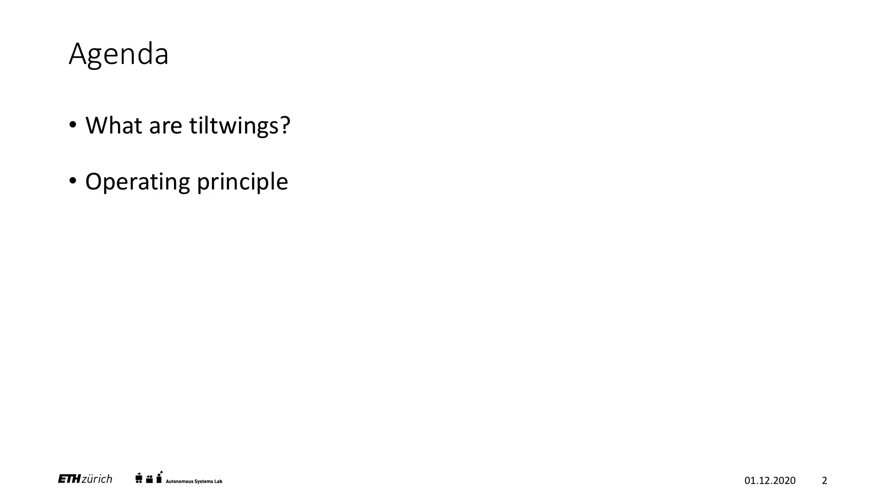In this case study, I'd like to give you some insights on how we model and control this kind of aircraft and what the related challenges are. I'd like to start with a brief introduction on tiltwings in general and why they are interesting. Then I would like to say a few words on the operational principle of such a tiltwing UAV before moving on to the core part, which is our approach in modeling this platform for the purpose of control, but then also the controllers themselves that are currently implemented on the tiltwing, which is the attitude controller on a low level and the cruise or velocity controller on a high level.

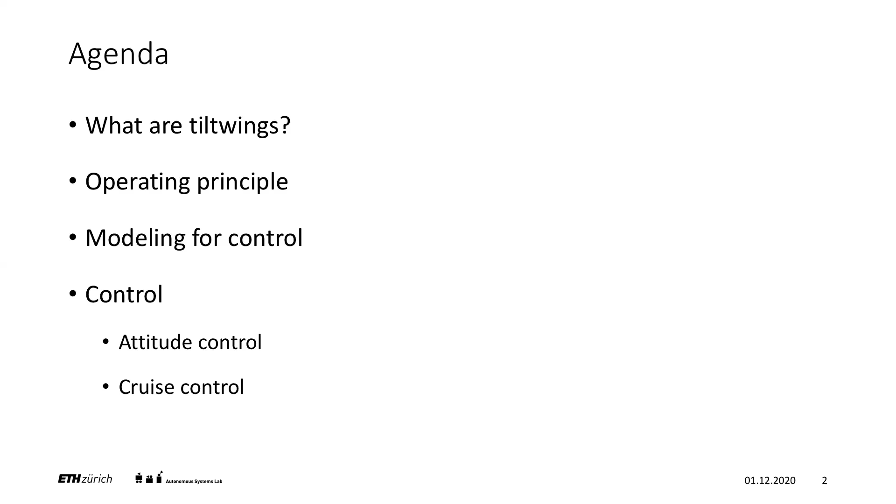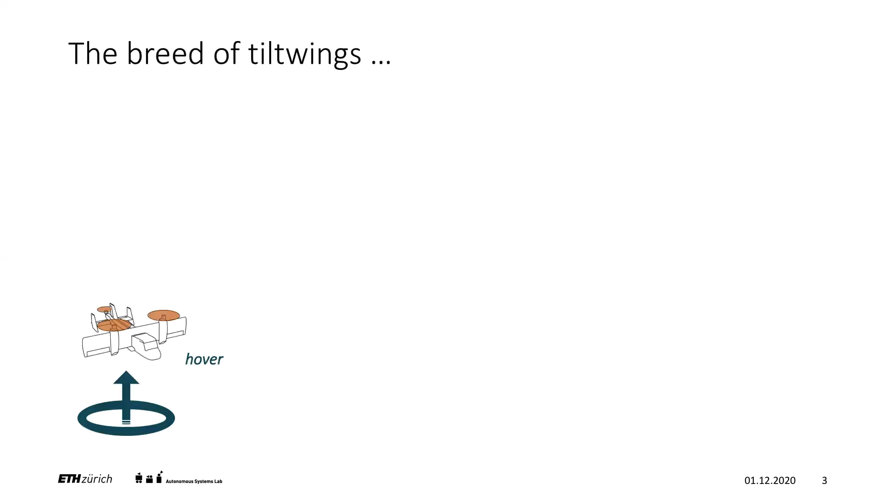So let's start with some zoology. As the name already tells, the tiltwing is a convertiplane which tilts the wing together with the propulsion between an upright position for rotary wing hover flight and a horizontal position for fixed wing cruise flight. In between, we speak of the transition phase, and there the lift is shared between the propeller and the wing. The operation in the transition phase is somewhat a blend between helicopter and fixed wing.

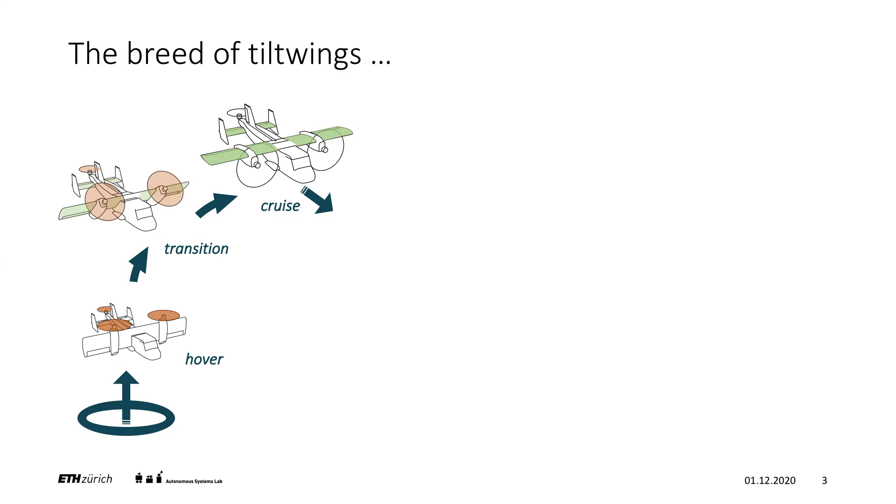Now, the advantage of such a platform, as with almost every other hybrid platform design, is the combination of the flexibility that we get in rotary wing hover flight with the endurance, speed, and range that we get from standard fixed wing cruise flight. The idea of tiltwings is not particularly new.

First examples date back 60 years ago. And although proven as a concept, tiltwings were never put into regular manned operation, and were not really further pursued. Only now, interest in tiltwings is sparked again for application with UAVs, but then also within the wealth of concepts showing up recently for urban aerial transportation, such as air taxis.

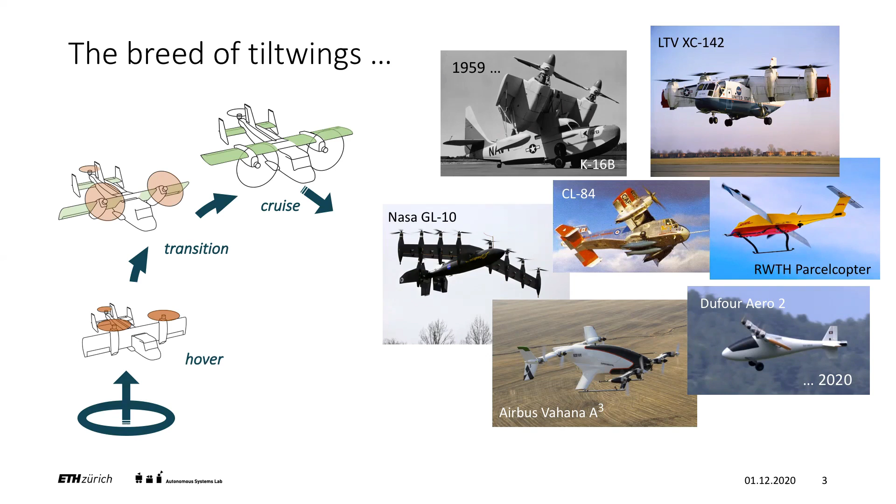Now, like with every design, there are particular pros and cons for a tiltwing. Comparing with a tailsitter, for example, one advantage is that the fuselage remains horizontal most of the time, apart from pitching. This is beneficial if we are, for example, transporting people, but also depending on the payload that one might have, this is an advantage. Furthermore, the standard aircraft tail of a tiltwing gives it additional control authority when comparing with a tailsitter, which doesn't have this additional tail.

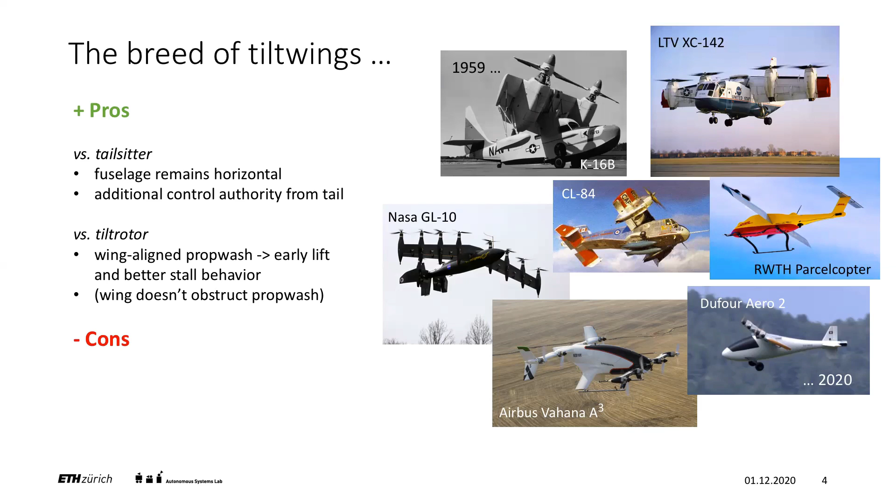Compared to a tiltrotor, a tiltwing features wing-aligned prop wash, so lift is generated earlier on in the transition, and overall, the forced flow over the wing gives it a somewhat more benign stall behavior.

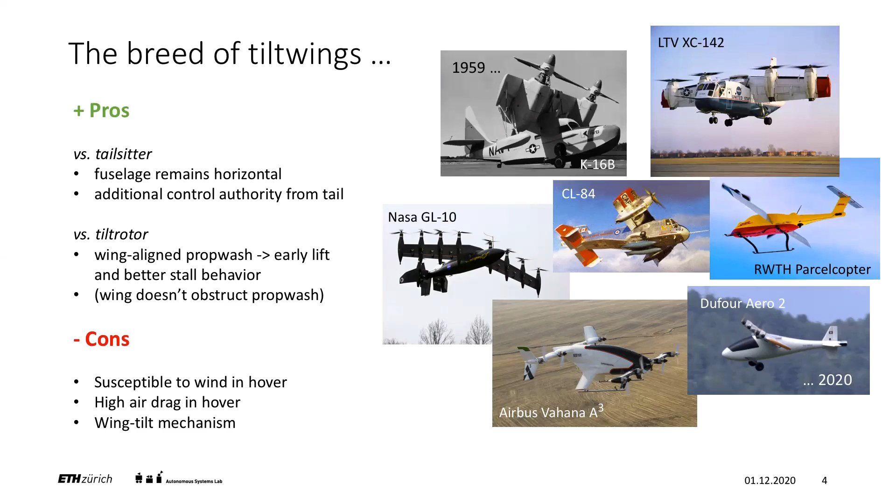There are disadvantages, however, as well. Most importantly, a tiltwing is pretty susceptible to wind in hover due to the large area exposed by the wing and potentially facing into the wind. Then also, for the same reason, it has high air drag in hover, and in the end, the wing tilt mechanism itself might be considered too complicated. But this depends a bit on the application.

So before going into more detail on the modeling approach that we choose and how we're controlling this platform, let's have a look at the basic operating principles and the controls that we have available.

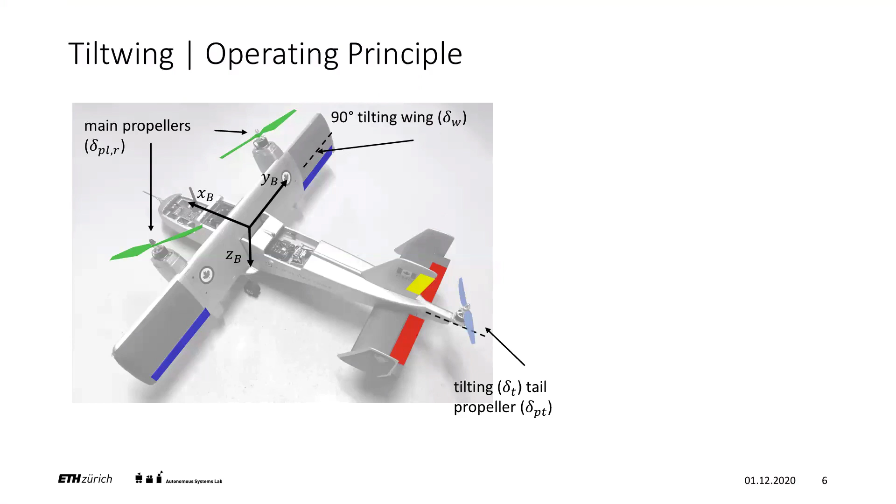So of course, there's the wing, which is able to tilt. Then we have the main propellers, which are mounted to the wing, and they generate most of the lift in hover flight. Furthermore, we feature a propeller in the tail, which is required for pitching in hover, and it's also able to tilt around the x-axis in order to actuate the yaw in hover. So overall, in hover, we fly this platform like a standard tricopter.

Furthermore, we have the ailerons, the elevator, and the rudder, which sum up to the standard fixed-wing controls that we use in cruise flight. Now, with this combination of actuators, we realized that the platform is over-actuated for the task of attitude control. So for example, in hover, if we want to yaw, we can do this in two ways.

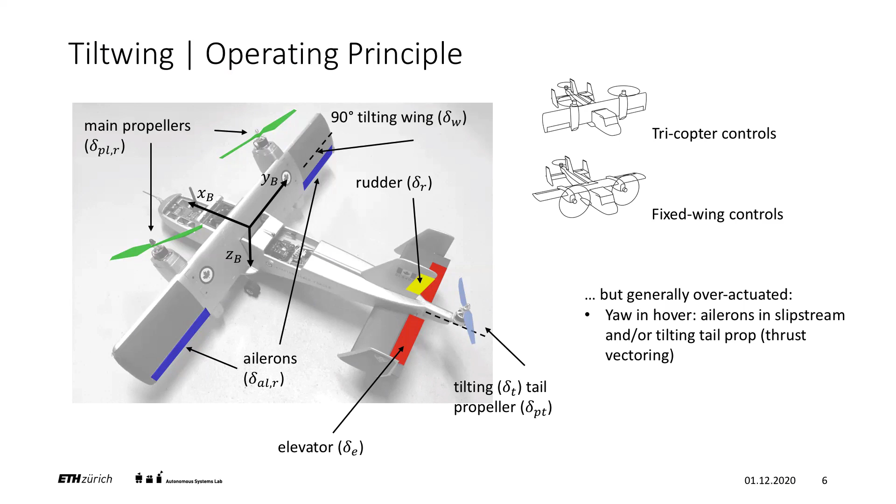We can either use the tilting tail prop, so the default standard tricopter way, or we can also deflect the ailerons, which are partly located in the slipstream, in order to deflect the slipstream and thus generate a yaw torque.

In cruise, there are also two ways to yaw. We can either use differential thrust on the propellers or use the standard way. Same for pitch, you can either use the elevator and/or the tail prop. So with these combinations, or multiple actuators for the same task, we have increased control authority in general, but we can also consider this as a set of redundant actuators, which, in case one of them fails, we would still have a backup, which is also something nice to have here.

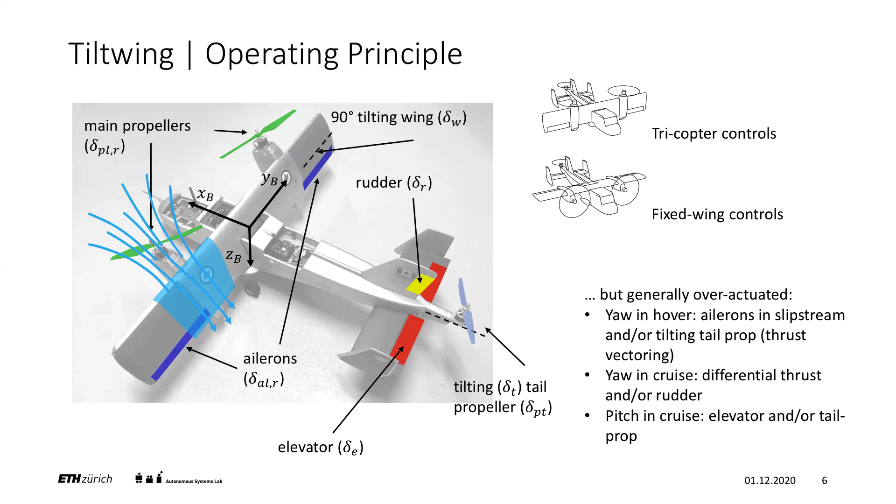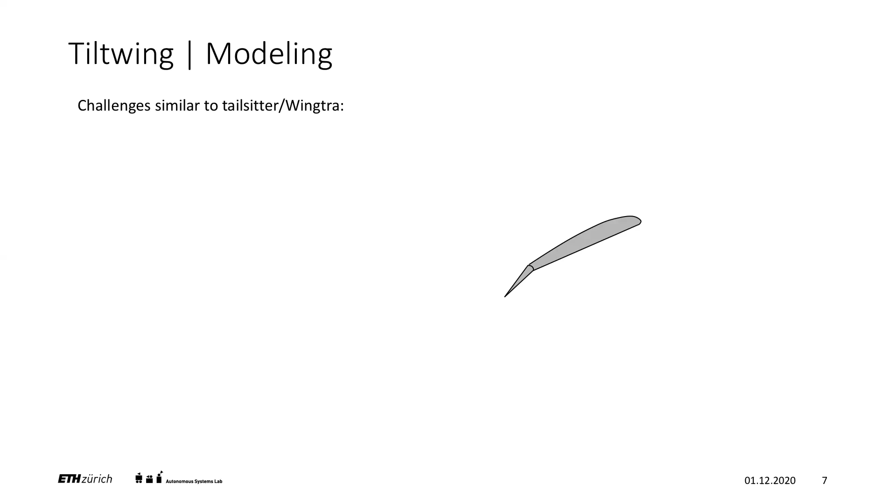Okay, so this would be the basic operating principle of the tilt wing. Then, in order to control it, we first need to have a model, and when doing so, we face similar challenges as we've been introduced to in the case study on the Wingtra tailsitter.

First, there's the wide range of angles of attack that the airfoil and the tilt wing faces. We really need to make sure that we capture the full 360 degree range of angles of attack. So we model the lift and drag curves qualitatively, as you see it here in the plot on the bottom right.

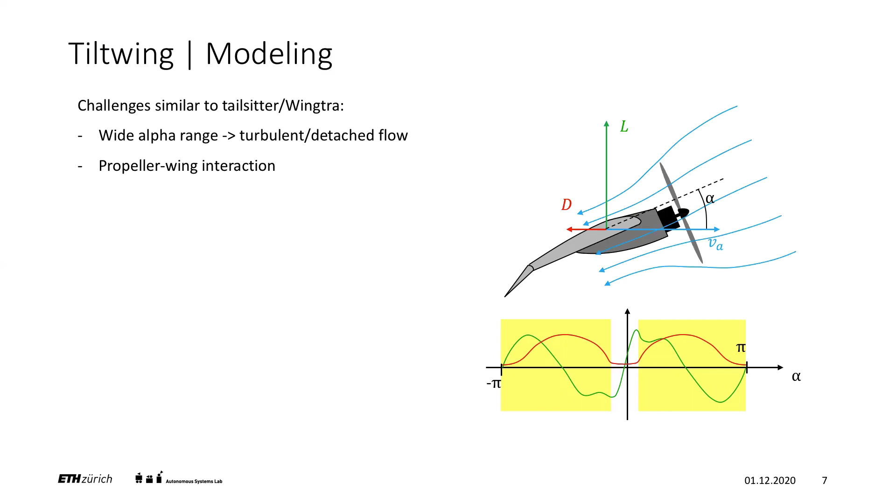Then we have the interaction between the propeller and the wing. So for those segments of the wing which are located behind the propeller, we need to consider the propeller slipstream. What we're doing there is a simple superposition of the free stream velocity VA with the slipstream that we calculate based on standard actuator disk theory. Then we can calculate the local angle of attack and adjust the lift and drag accordingly.

Furthermore, and this is a bit different from a tail sitter, we have the standard aircraft tail, and especially the horizontal stabilizer, which is affected by the wing in front of it. So this is on one side the downwash of the wing, but then also in transition we have for sure turbulent flow, which acts on the horizontal stabilizer, and this is really pretty hard to model. In our current approach, we just assume that the horizontal tail is in the plain free stream, but this is likely not true in reality.

Overall, the question that we are asking here is, what is actually necessary for control? Currently we're doing somewhat well with a modular component buildup. So we partition the aircraft into multiple segments, and then we sum the forces and torques of each individual airfoil segment, which generates lift and drag according to the curve you see on the right.

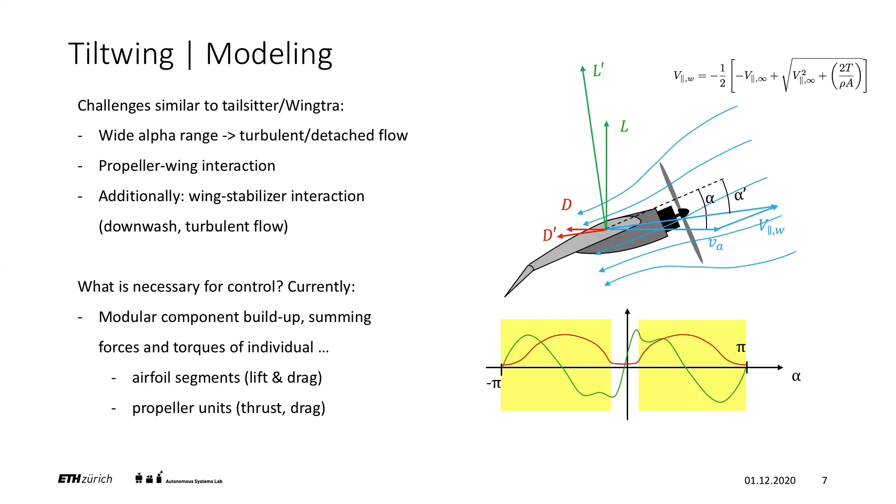The separate propeller units, which also mostly generate the thrust and drag, but then also the slipstream, which in turn affects the airfoil segments, and then the fuselage, which is mainly generating drag. So we partition the UAV into these different components and do calculations on them separately, put everything back together, and this determines our dynamics.

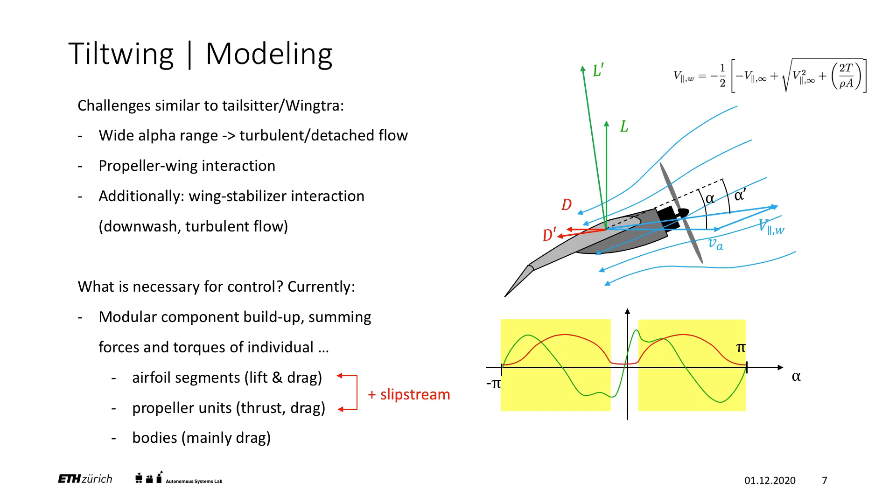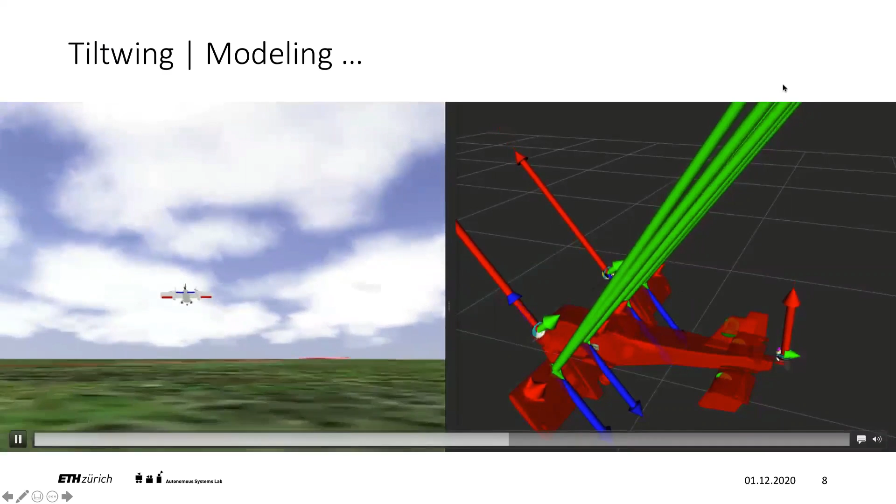As I play this here, you see on the right, as we increase throttle, thrust increases as well on the prop. And then in blue here on the wing, we have the locally calculated slipstream. The long green vectors are the lift generated on that particular segment. You see those vectors are pretty much longer than the one on the tip of the wing, where we only have a free stream and a different angle of attack, and pretty much lower dynamic pressure, which is why the lift was so small there.

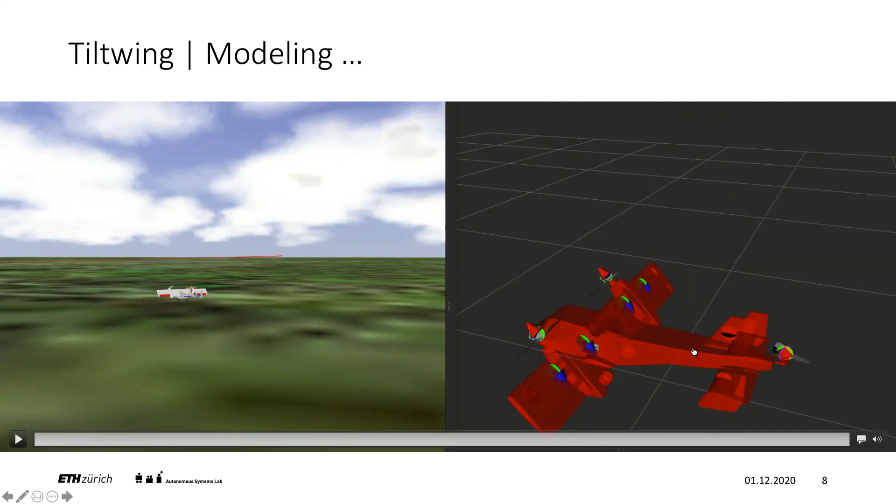So this should somewhat illustrate this component-based approach here. You see the wing has 8 different segments, 2 on each side are subject to the slipstream of the propellers, and on the tail we too have these segments, and so on.

With the model at hand, the next step that we do is try to identify the parameters that we have in order to match the behavior of the real system as closely as possible. So this amounts to a gray box system identification process here.

What you see in these plots, on the top two plots in blue, is the measured linear acceleration in X and Z direction during a flight, which includes hover phases in the beginning, transition in the middle, and cruise flight at the end. In red, you see the fit of our predicted model, or predicted acceleration, based on the current state, and we fitted the parameters such that these two signals match as closely as possible.

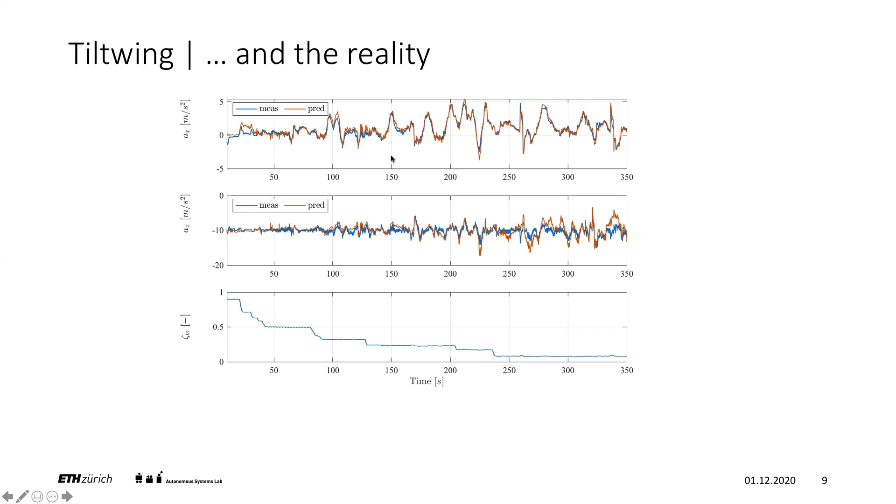You see that the parameter model we're using has good descriptive power, so we're fitting this data fairly well. The downside is that it's over-parameterized, so there's a subset of parameters or different combinations of parameters which yield the same input-output behavior. Within this null space of the parameters, we're free to choose different values, so there's also manual tweaking involved. We need to make sure they're somewhat close to physically reasonable values. And yet there are some gaps which still need to be filled, so even though it's quite descriptive, it can still not match the full reality.

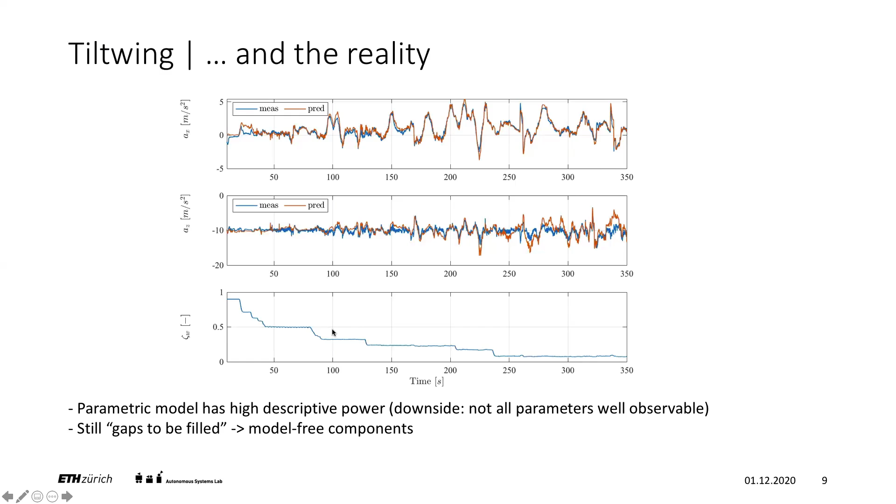Reality is still a bit more complex. So in the future, if we decide this requires increased complexity, we can also use model-free components, such as universal function approximators, if we see that certain effects still need to be modeled for control. To illustrate one of these effects that we have in reality but which is not modeled, let's have a look at the wing.

Let's have a look at the wing during transition from cruise to hover and then back again. What I'd like you to look at: first we have these two segments in red, which are only subject to the free stream, and then we have the blue segment, located behind the propeller, which in addition to the free stream also sees the slipstream of the propeller. Our model would assume a somewhat uniform slipstream for this entire area.

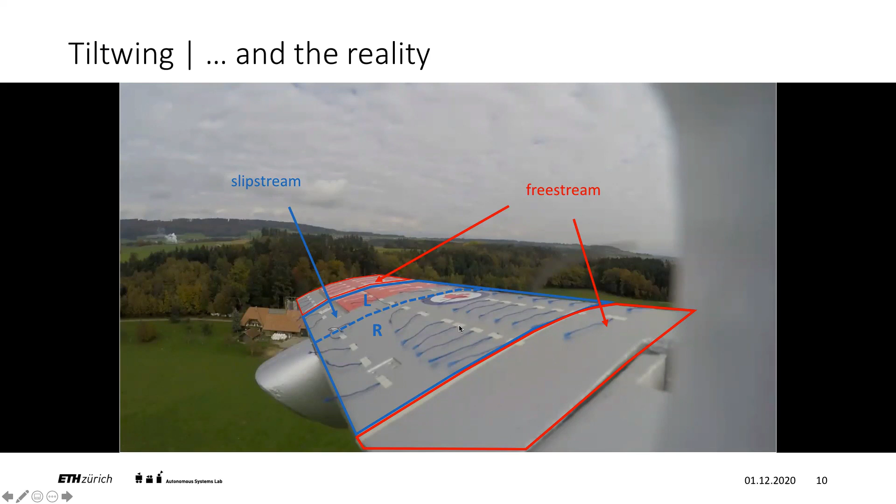But as we'll see, we can actually partition the behavior into the left and right hand side. We'll see these tufts, these strings mounted on the wing, used to indicate whether the flow is attached or not, or somewhat laminar or turbulent. You'll see the flow behavior is different on the left and right hand side as we go through a transition. Let me play this video.

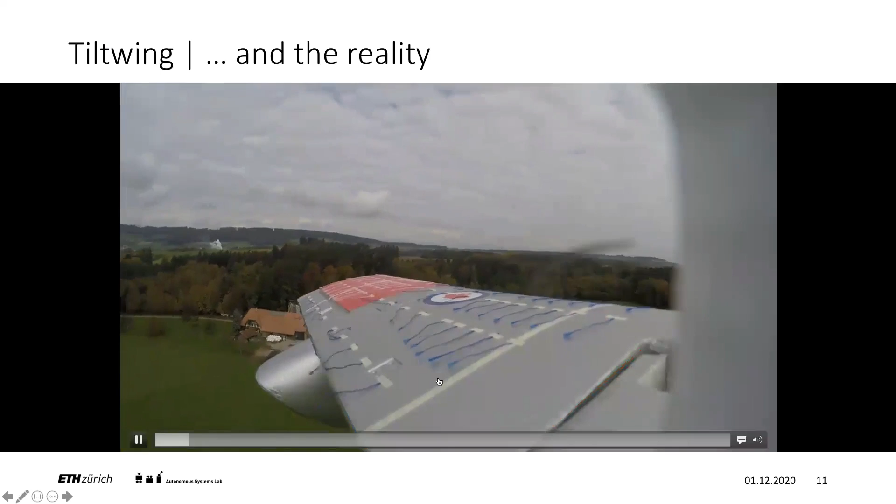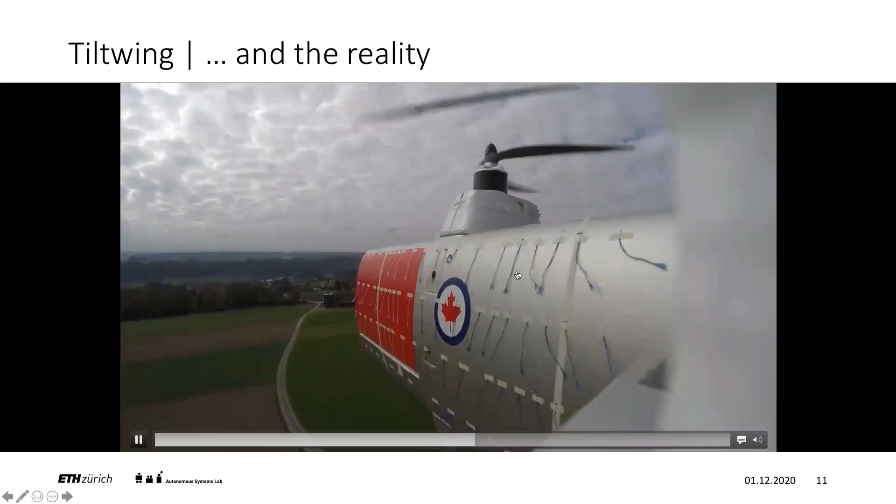We're in cruise, now we're starting to tilt the wing up. You'll see that here on the right hand side, the tufts start to dance around quite wildly, indicating that the flow is detached and very turbulent. The left-hand side was somewhat better attached throughout the transition. The same can be observed when going from hover to cruise again.

The reason for this different behavior on the left and right hand side is that the propeller slipstream also has a swirl component, which is not modeled in our current approach. This causes a lower angle of attack on the left-hand side than on the right-hand side. Thus, the right-hand side showed this more pronounced stall behavior because it overall has higher angles of attack, maybe even higher than the free stream components.

So this is just an example of how reality is actually more complex than what we're modeling, but I guess you would have expected this anyway. For the purpose of control, however, the model is somewhat okay so far, so we're in a good position to start implementing controllers.

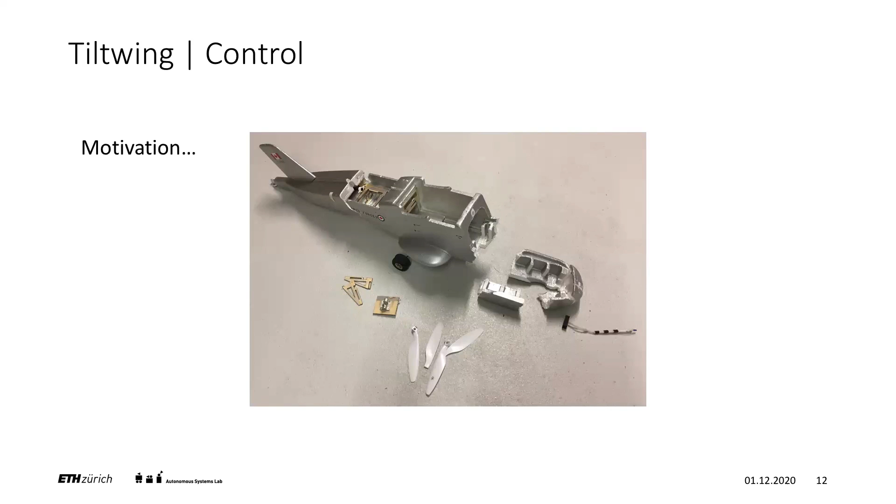For one, because we want to prevent this from happening - the platform is inherently unstable, so we need to make sure it flies stably and doesn't crash. But overall, we would also like to have well-performing operation and eventually enable applications for tilt wings in general.

Currently on the tilt wing, we have the low level implemented as well as the velocity control, and so in the following steps I'd like to focus a bit more on those two elements.

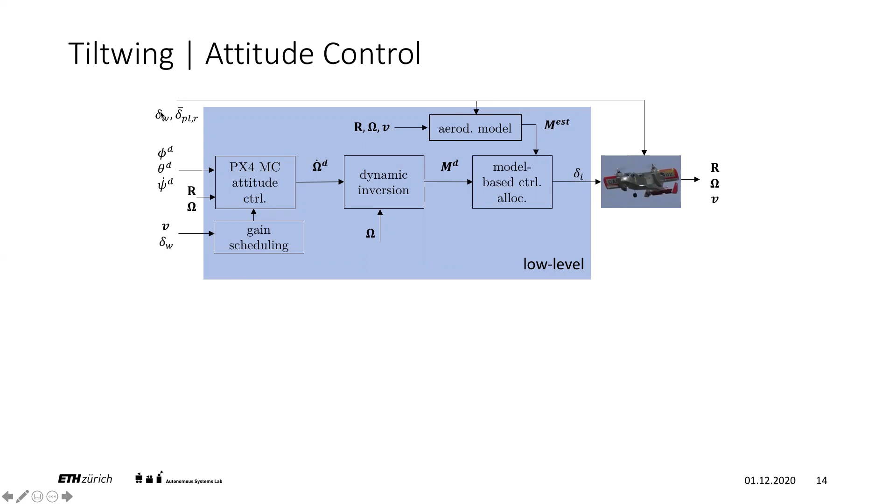Now all this is implemented on the Pixhawk flight controller, together with the state estimation, running in a somewhat customized PX4 firmware.

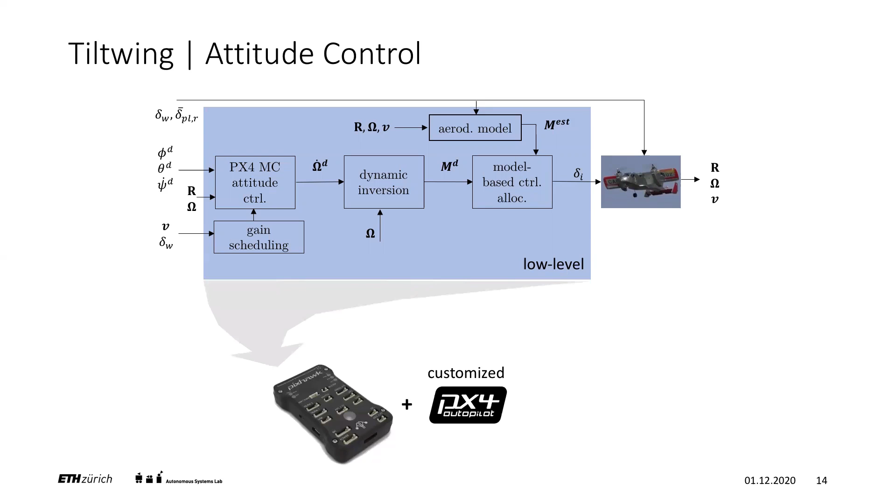Let's go through this lower level control step by step. The first part takes the desired attitude and current attitude and calculates the desired angular acceleration. This is a two-step process: first a P controller, then a PID.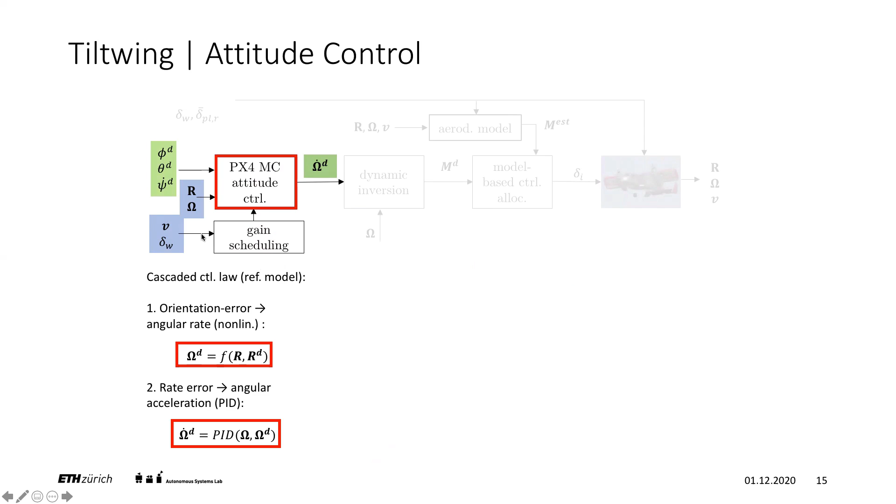This scheme is completely model independent, so it's really just geometric, and it defines the reference dynamics that we would like to follow with our platform.

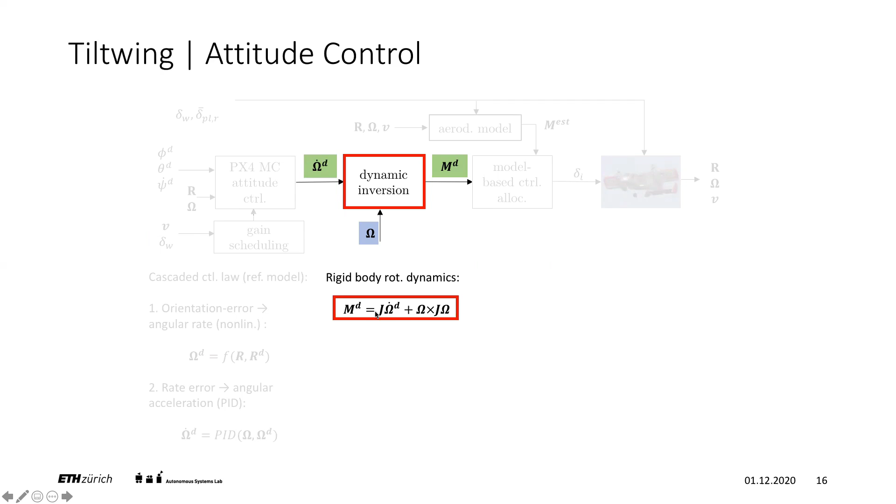With the desired angular acceleration at hand, we can then use dynamic inversion, which is basically just solving rigid body rotational dynamics for the torque. We calculate the desired net control torque which would achieve this angular acceleration. Note this is the first model-based step, since here we need an estimate of the moment of inertia of the platform.

With this control torque at hand, we can move on and use our aerodynamic model to figure out what the control surface deflections and throttle settings need to be. This is a two-step approach: first we ask our aerodynamic model, which uses current airspeed and so on, what the current aerodynamic torque is. We compare this with the desired net torque and get a residual torque that we'd like to actuate with our control surfaces, then move on to the allocation.

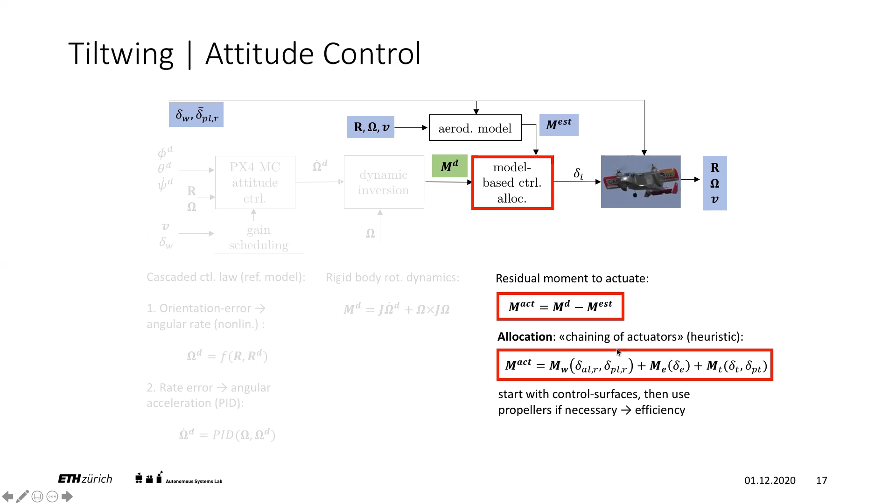Recall that the platform is over-actuated for the task of attitude control, so there are multiple ways we can use the control surfaces combined with the throttle settings. What we use here is a heuristic called chaining of actuators to deal with this over-actuation and get a prioritization of actuators. I'll explain this in more detail.

We have this desired, or residual, torque that we'd like to actuate from before - the delta we still need to add to what we already have in order to achieve the desired torque. For example, for the yaw axis we have small n, the desired yaw torque, and we go to the rudder and first try to achieve as much as possible of this torque with just the rudder.

It might be that this torque is just generally too high, or the rudder is not effective because airspeed might be low, for example in hover. So it's well possible that we saturate this actuator and are left with a residual torque, which is passed on to the next actuator group. Similarly with the elevator, we use that one first to allocate pitch, and if it's not sufficient, we pass the residual to later actuator groups.

Note that the actuators on the wing are both responsible for roll and yaw torque generation, so we allocate them jointly. In any case, we might still end up with some residual torque in the end - a full saturation, at least when using this scheme.

What we would need to do in this case is detune the attitude controller and make it a bit less aggressive. Saturation is something we generally want to avoid, because it might skew the direction of the moment we actuate, and the behavior might be somewhat off.

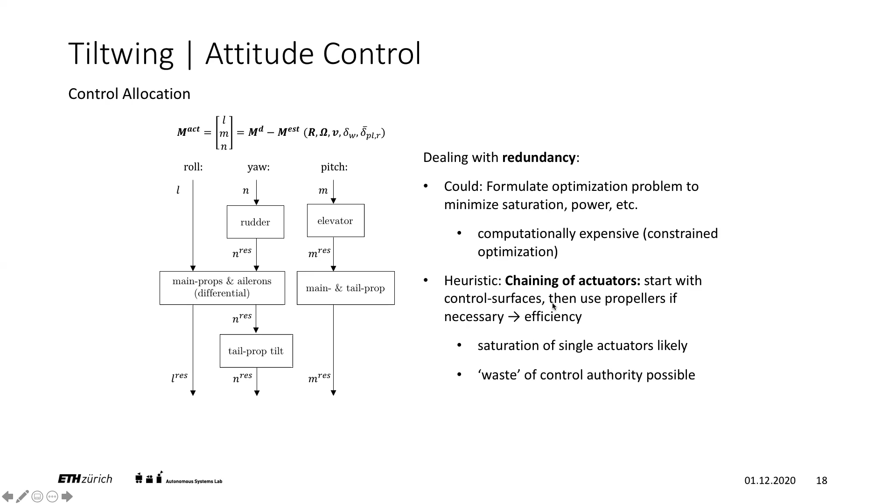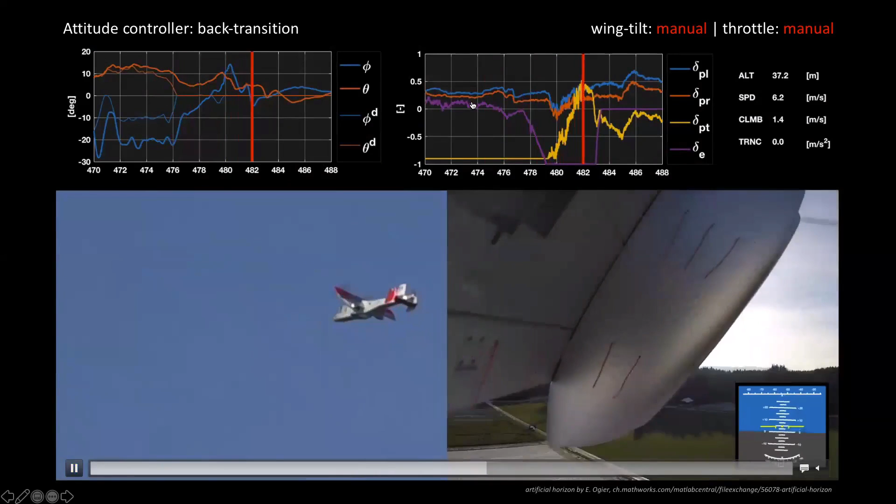So now let's have a look at what this looks like in action. Here doing a back transition where the attitude controller is tasked to keep somewhat a level attitude, as you see here. On the right-hand side in the plot, you see the control signals sent to the actuators, whereas in cruise, for example, the violet signal here, the elevator is somewhat in a neutral position.

And then as we start to tilt the wing up, we generate a negative pitch torque, which we need to compensate with the elevator. So we start deflecting more and more until it saturates, and this is where the tail prop starts to rev up. So this illustrates nicely this chaining of actuators here.

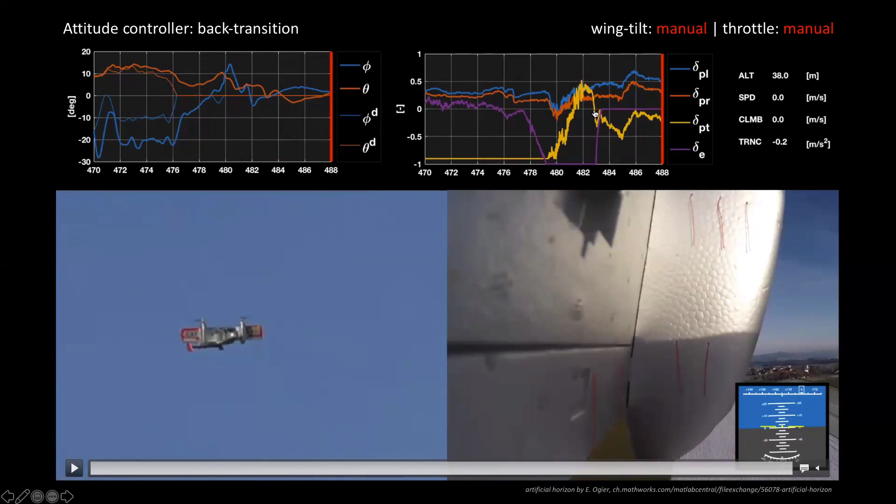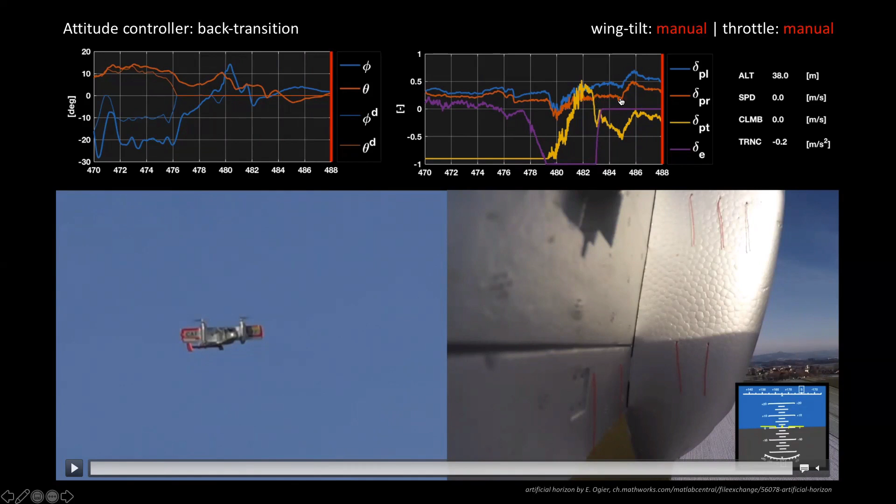Also then in the end, once the airspeed is really low, we also put the elevator back to neutral position, and here have some kind of additional tweak so that we don't end up with a very twitchy elevator, because again, it's allocated first, and if we don't prevent this actively, it will just always saturate because it's so ineffective basically. So we have an additional kind of smoothing here that if it's really not effective at all, we just set it back to 0.

Okay, so now with an attitude controller at hand, we can already have quite some fun with this platform and flying it around. But then to achieve really automatic or even autonomous missions or operation, we for sure need the high level. So far, we have the velocity controller implemented, and we'd like to share some more insight on that one as well here.

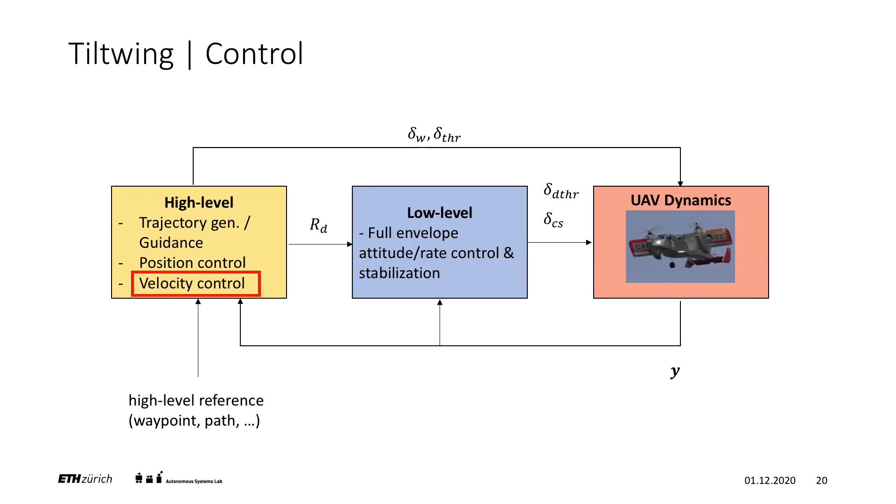So the idea is that we give a desired airspeed here, just longitudinal airspeed, so vertical and horizontal velocity, and we calculate a wing tilt, the mean throttle setting, and the desired attitude to achieve this airspeed. Note that these are the necessary and sufficient set of actuators or states that we need to control airspeed.

So in hover, for example, we use the throttle for vertical velocity control and the pitch somewhat for horizontal velocity control, and vice versa in cruise.

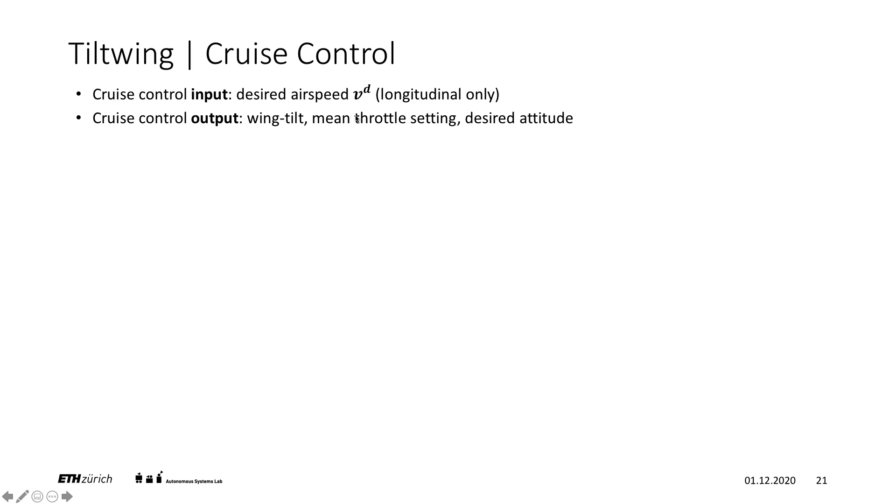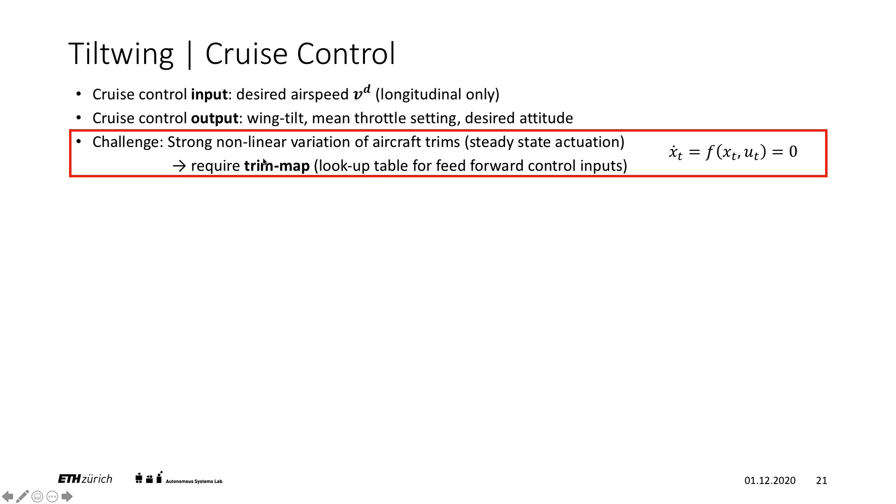So what we can do is ask ourselves, given or assuming that we're already at the desired airspeed, what would the input look like in order to stay there? So the steady state input given a desired airspeed. Then we can calculate the trim maps that you see here, and use those kind of as a lookup table for feed-forward control later on.

Now, it's important to realize here that also for this task of cruise control, the platform is overactuated. So for example, if you want to have 0-0 airspeed, you can do this multiple ways. You can do it in standard hover configuration, but you can also have the fuselage at 90-degree pitch and the wing in cruise configuration.

So there we need to include additional objectives besides just reaching a steady state to have a unique solution. And generally what you see here, like in hover, the wing is at 90 degrees, and then as we go to cruise, we put it down to 0 degrees.

The throttle here, interestingly, the entire colored area determines the flight envelope of the aircraft, and here that one is basically bounded by the maximum throttle that we can achieve. So we cannot steadily keep a velocity above, say, 26 meters per second in level cruise flight. This is just not possible.

And for the pitch, what you see here is kind of the logic that we have, that we align pitch with the flight path angle. So this is a polar plot, actually, I should have mentioned this. So airspeed equals radius, and flight path angle equals the angle here.

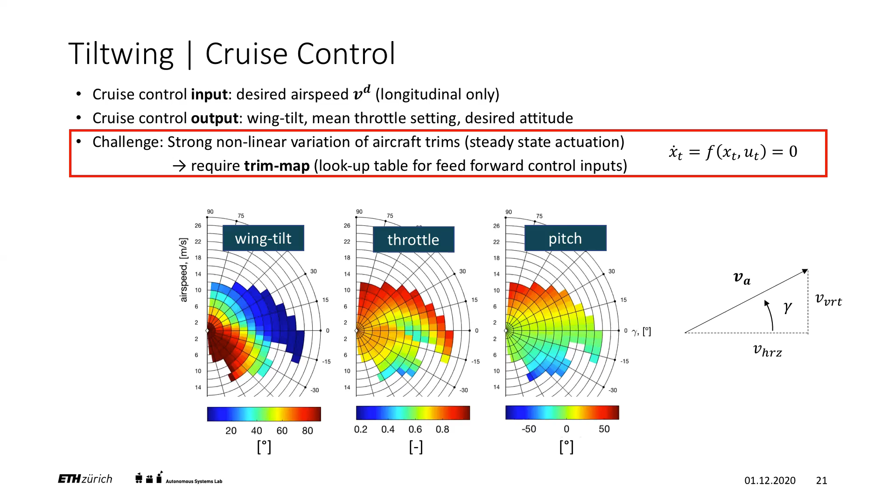So these trim maps, basically this trim analysis, forms a core for the cruise controller, which is shown here. You will see that there are two paths in here. First, we have the feed-forward path, where we take the desired velocity commanded by the pilot, user, or even a higher level. Then we basically go into the trim map and look up the corresponding trim pitch, wing tilt, and throttle settings.

Note that we should not choose a trim value for a velocity too far from our current velocity, because then this might be way off as a feed-forward term for our current state. So we constrain the lookup in the trim map based on our current velocity, bounding it close to the current state rather than jumping straight to the desired velocity, so the trims stay reasonable while still going in the right direction.

Note that these trim inputs match a certain airspeed and define a steady state, but a steady state by itself is not guaranteed to be a stable one. So if we are in a steady state with these inputs and then are perturbed, it might not be guaranteed that we actually go back to our velocity. These points don't need to be attractive.

For that reason, and also for disturbance attenuation, since we're sure to make errors in the first place, we need a feedback loop as well, which is the second path here and is pretty simple. First we take the velocity error and with a PID get a desired linear acceleration, relate this to a desired force, which then in a control allocation step is related to corrective pitch and corrective throttle, these deltas, which we add to the trim values.

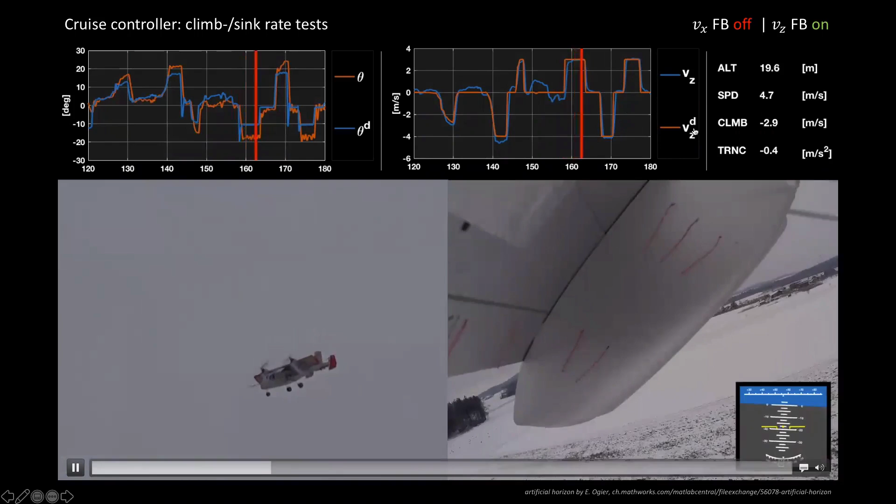If you have a look at what this looks like in action, here's an outboard view and an onboard view. You see how we're ramping up and down, having these steps in the desired vertical velocity, and how we manage to follow this quite well. Also note how the wing always adjusts its position—this is basically the lookup we obtain from the trim map.

The wing is only feed-forward controlled here because its dynamics are too unpredictable, but it adapts itself in a somewhat optimal way, the way we defined it in our trim optimization. It adapts to the airspeed commanded right now. Also note that in this case, only the vertical velocity was feedback controlled; the horizontal one was just feed forward.

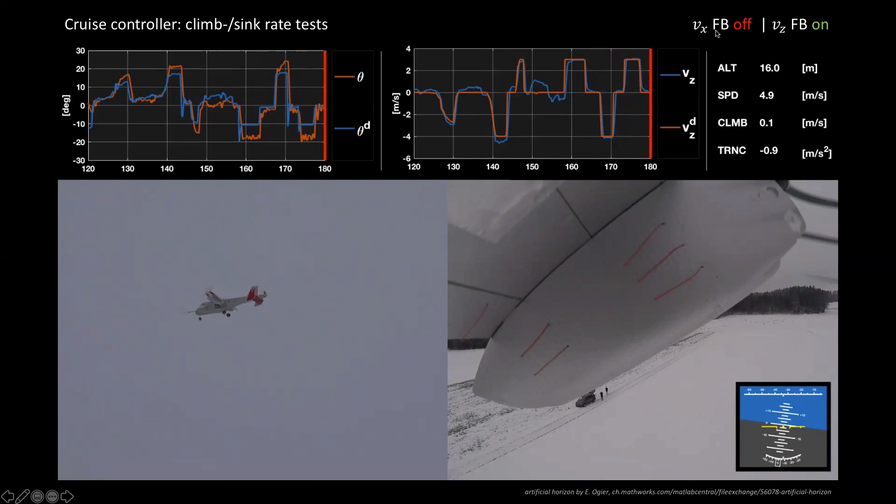It actually turned out that this controller is quite difficult to tune, mainly because with this allocation we neglect the dynamics of the pitch and the throttles, or thrusts, which might be somewhat borderline in that case, resulting in undesirable control behavior.

So it was easier to just control one of the two variables and let the other one be open loop, which then also motivated this approach where we weight both of them in a regularized least squares approach.

But in order to actually take these different dynamics into account, especially the dynamics of the wing, which was neglected in the first place, we're currently looking into using a model predictive controller instead, which knows about the different dynamics of the pitch, thrust, and wing, and can therefore dynamically allocate these different quantities so that they match together well with their dynamics.

First results are also somewhat promising already, so we achieve simultaneous tracking of both horizontal and vertical velocity. We're developing this further at the moment.

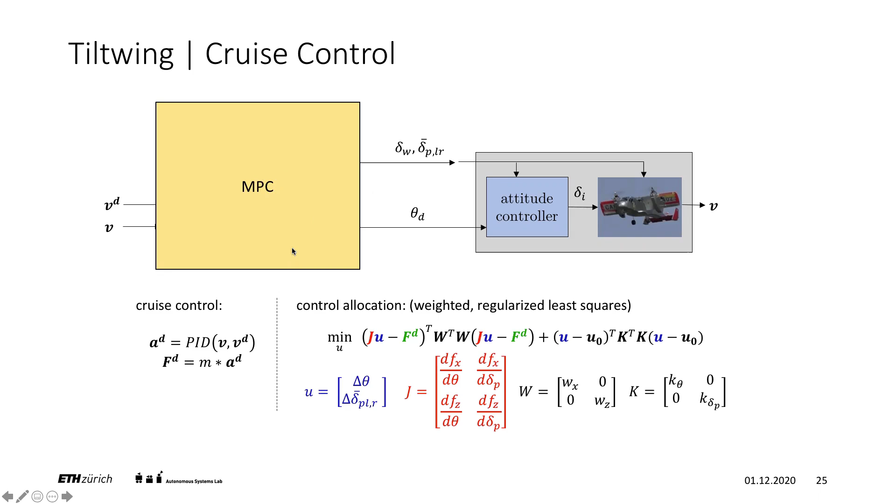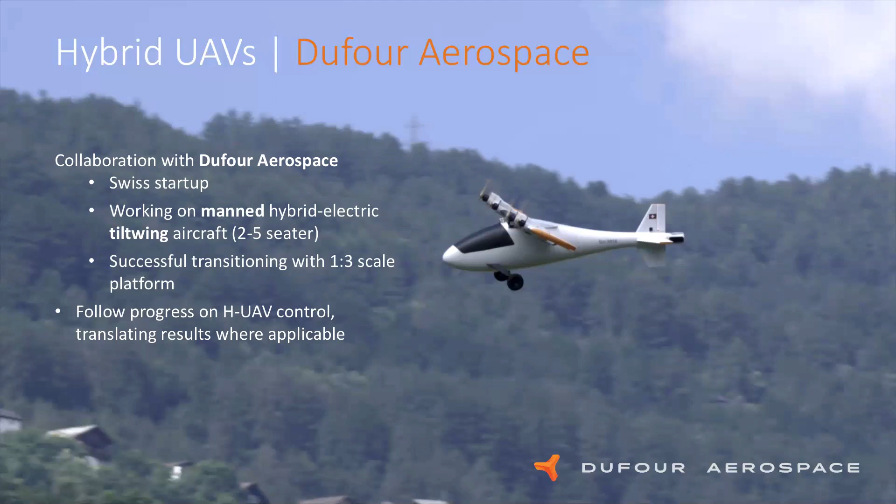Okay, so with this, I'm almost at the end here. I'd briefly like to give a bit of broader context on our research on tilt wings. I already mentioned Dufour Aerospace, a Swiss startup which works on tilt wings for manned transportation. They currently have a quite big UAV already, and we're collaborating with them to share experience on control, and also to get an understanding of how models translate between smaller and bigger platforms, and whether the model we just presented is general enough to be applicable to platforms of different sizes, which would be interesting also from a research perspective on how to model hybrid UAVs, or in this case, tilt wings in general.

Okay, so with this, I'm at the end of this case study on tilt wing modeling and control. I hope you got some insights, and if there are any more questions, I'm happy to discuss them with you in the live Q&A. Thanks a lot for your attention.